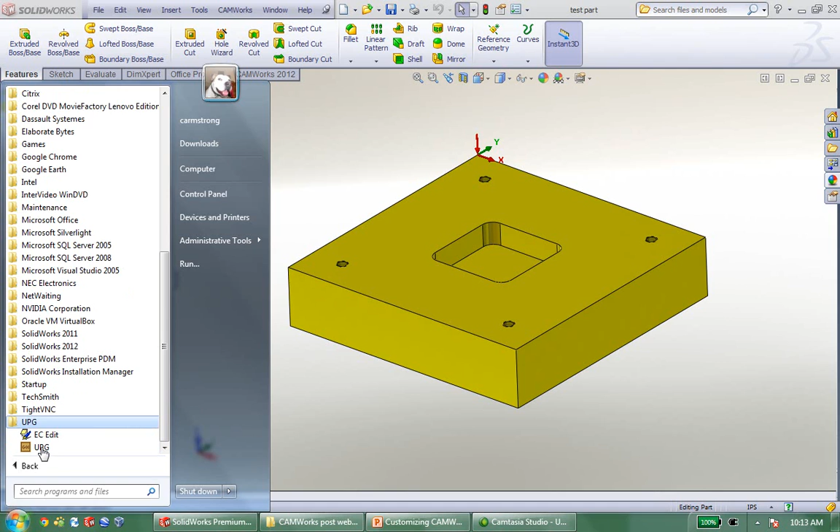I'm going to go ahead and launch the UPG. Okay, this is the interface. Again, it's very friendly. It's not a lot of computer programming, it's simple in that sense. It is a bit of a different workflow, though.

In the case of the UPG, for instance, I'm probably going to create a post from scratch. I'm going to create a post starting with a generic FANUC controller, and build on top of it with whatever features I may use. I use FANUC controller as an example, but it could be anyone. Whereas if I'm working with the EC editor, chances are I was sent that file, maybe from Digital Dimension support.

I called up and I said I need a post processor for a Fadal 4020, and the support rep sends me this post and the zip file. I open it up and I start editing it. Chances are I'm going to be doing that with the EC editor, and I'm going to go over an example of that later. But with the UPG, most of the time I create it from scratch. I start from an example post and just start building it. So that's what I'm going to do.

I'm going to start a new post processor. File, New. It's going to ask me what type of machine, mill or turn. In this case, I want a mill. I want it to be a FANUC based controller, and remember, this is just the base. Then I want it to be a Haas. We'll call it a Haas controller. Once I have that, I'll just hit OK.

And now I've opened up the Haas source file. Again, because this is such a friendly interface, it's really just a bunch of buttons that allow me to customize it. But this is the source file that's used to compile to make your post processor. So, without going into too much detail, you'll see here I've got details like the machine name. If I had 5 Haas machines, I probably want to give it something else besides just Haas - Haas VF3, Haas VF3 number 2.

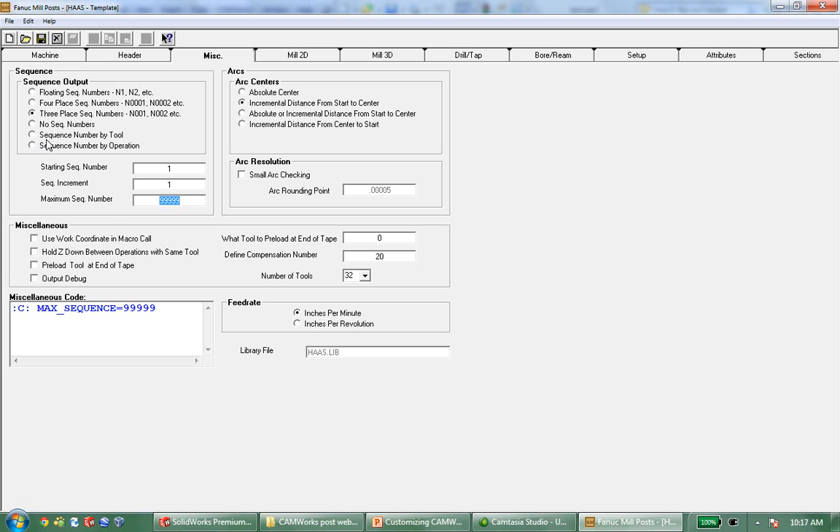Other than that, I'm going to move on. Getting into some of the mill-specific features, there's not a lot of detail I'm going to go over specifically. Absolute and incremental—a lot of the time you want to control these from CamWorks. Work coordinates, coolant—these are all things I can control from CamWorks, which is why I'm not going to spend too much time on them.

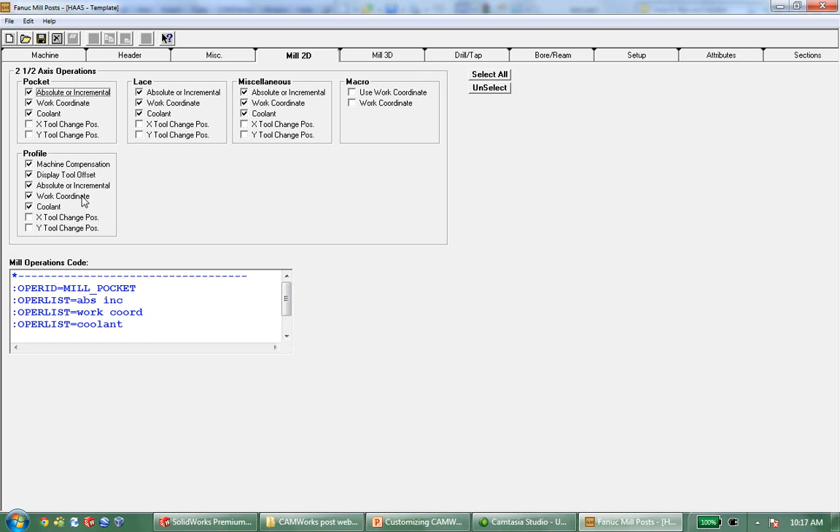Some obvious options, like display tool offset—those are things you're going to need to have on, but I can see specific scenarios where that may not be useful. Maybe not for milling machines, but laser cutters and things like that, where I may not need a tool offset. Getting into the interesting bit, I have my mill sections, all with really the same options.

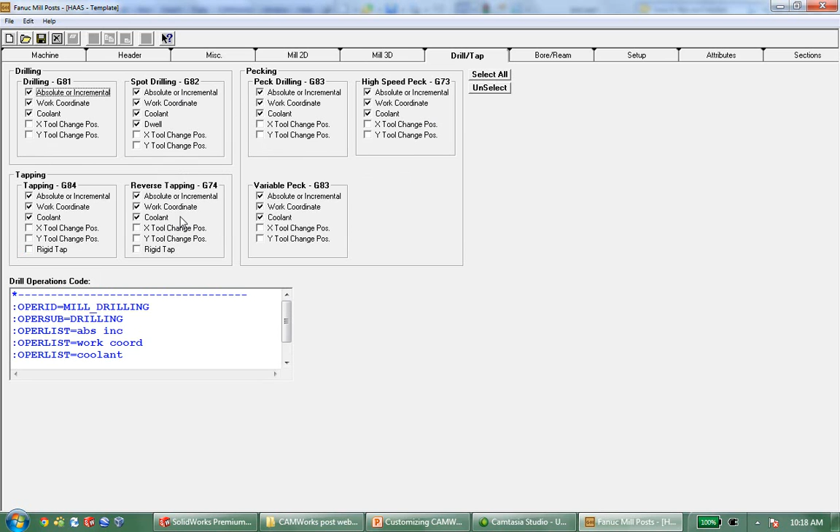Do you want coolant on in UV cuts? Do you want it to be absolute or incremental in UV cuts or Z-level cutting? There's a lot of specific settings for specific operations in CamWorks—I'm not going to worry about changing any of these. Same thing for drill and tap: do you want it to dwell, do you want coolant on—all specific to an operation. G83 peck cycles, G84 tapping cycles, and so on.

Where we get into the interesting stuff is some of the setup. Now, the setup allows me to make the user punch in a number in CamWorks that will end up in the post. By default, you'll see it's prompting for program number and material thickness, but those are the only two—see how they're checked here? But if I wanted it to prompt for program name, maybe because I have a naming series for all my programs and wanted someone to punch that in, I could check this here.

Operation number, date—there's a lot of information I could possibly add into this, but I'm not going to worry about that right now. The setup allows me to establish things in CamWorks that I want to punch info in for, that I also want to see in the post.

Getting into attributes, here's one of the big things I find most users want: the ability to right-click in CamWorks and insert either an optional stop or a program stop. I can do that by just checking Make Available in CamWorks. Now what it's going to do is create a feature that allows me to right-click on a toolpath and say Insert Post Operation, specifying an M00 or an M01—an optional or a program stop.

Now, the Sections tab is really where we get into the meat of the post processor. How things are defined, in what order, in what fashion. Do I like this before this, and so on. So a lot of the details and customization in the UPG is done right here in this Sections tab.

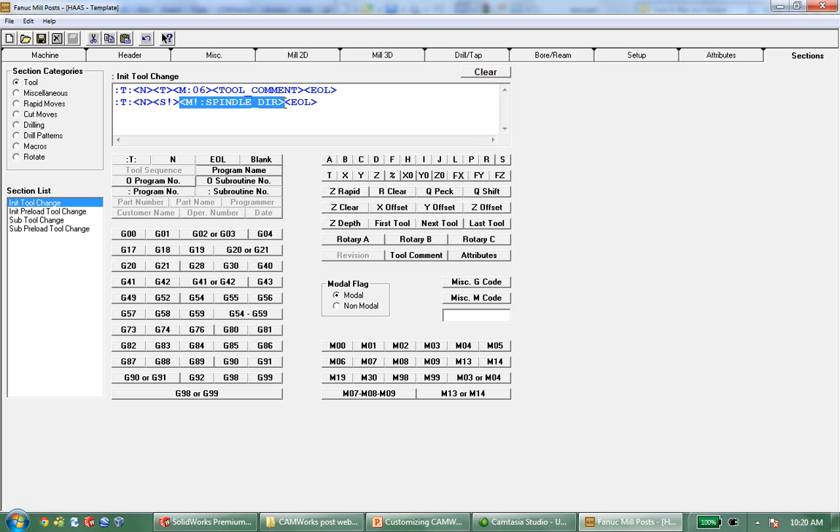Now it's a little confusing at first, but don't let all the nomenclature confuse you. Tool comment is just that - it's a comment that someone typed in CamWorks for this tool. And just like you might assume, M spindle direction is just that - it's the M03 or M04 that I might get calling up, turning on my spindle. S is the spindle speed, T is tool number, and M6, just like you might think, is the M6 command. So I can begin to decipher some of these things, even though it's computer programming to a certain degree. It's not very complicated programming, so it's easy for me to alter.

Going through this a bit more, if I go to my miscellaneous sections here, you'll see my start of tape. Start of tape is literally the start of the program, and that's why you'll see a percent symbol for your very first line. And then I get into my program number, O, and then the program number.

And then I get into the actual specifics of the startup line. By the way, this is just what they call a safety line - it cancels out all the previous commands that may have been up from an old program or from the last routine. Now, if I wanted to add to my safety line, maybe I wanted a different command in here, I could certainly just type that in.

But you'll notice the nomenclature is very specific. It always starts with a colon T colon. Then most of the lines start with an N, and the reason for that is that's a number line. So it's going to add an N1, N2, or in my case, N001, N002. But if you don't want it to post with a number line, you can get rid of this N.

For instance, I did that with both the program number and the very first line. I don't want N1 percent symbol - I just want it to say percent symbol, then my program number, then it can start with N numbers.

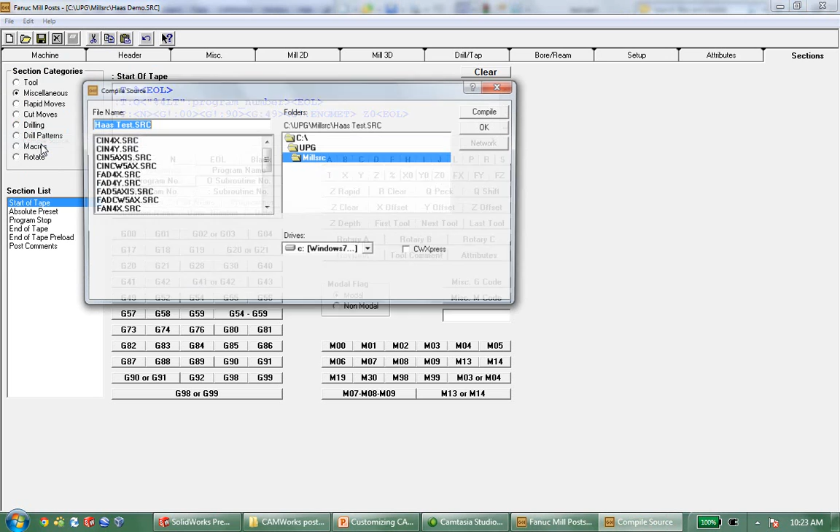Okay, and with that, you'll see it takes me to the default folder for the UPG, which is C UPG mil source, and in here you'll see all the different source files, including my Haas demo. So there's my Haas demo source.

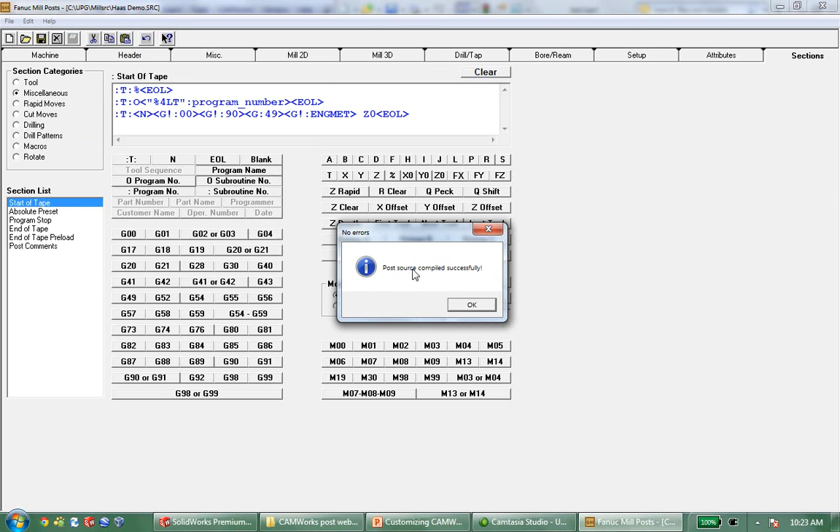I just hit compile, and I get a message: post source compiled successfully. Okay, now it compiled, but where did it go? Where's the finished product, right?

If I go to that folder, let's just browse to it here. C UPG mil source. There's no Haas demo CTL file, and if you have any experience with this, CTL files are what I'm actually posting to. The library and the source file, these two files here, are really just used to make that CTL file. So it's not posting to the mil source. I need to find out where it's posting, where it's compiling all this and putting it.

Okay, and to do that, I'm going to go into the preferences for the UPG. So file preferences, you'll see the pop-up here. I have a lot of details. The one I'm concerned with is CTL path.

This is the path that it's saving your finished post processors, and this is important because if I'm making all these changes and then I go into CamWorks and it's not changing and I don't know why, I'd make sure that the place I'm actually looking is this path. It's easy to make a simple mistake like that and not be posting to the right place, or not pointing to the right place in CamWorks, and not know that the things you're actually changing aren't being reflected.

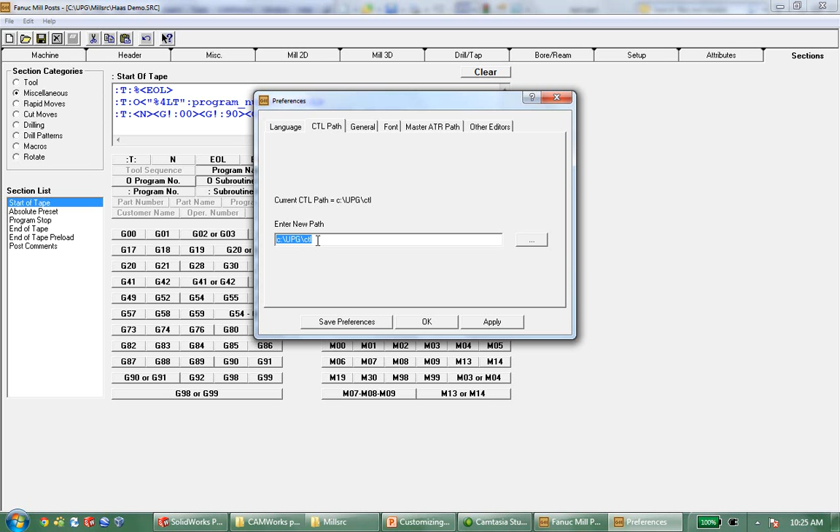Okay, so it's important to know where it's saving your finished post. In this case, it's the C UPG CTL. So if I go into that, we'll go C UPG, here's CTL, and there is my Haas demo CTL and lang file. We're going to get into this in the EC editor, but the post consists of multiple files: CTL, lang, lib, source, ATR, and potentially general files as well — Mil T32, general T32. It does depend on the post, and each file is necessary to compile.

You don't need all those files to use the post, but you do need all of them to compile it. And that's why when you get a post processor from Digital Dimensions, it consists of many different files. That's in case you want to open it up, change it, and compile it yourself. You have everything you need.

So I have this post, the CTL file here. I'm ready to post to it in CamWorks. Calling up CamWorks, you'll see here I have this part. I have already got everything generated. I have a pocket cycle and I have a drill and tap cycle, and I want to post using that one I just created.

So to do that, I need to specify use this post instead of my default, and I do that in the machine. So I double click the machine, I go to the post processor tab, and here I'm going to browse to my post. I hit browse. Right now that's the only thing in there, so I'm going to hit Haas demo, hit open, and select.

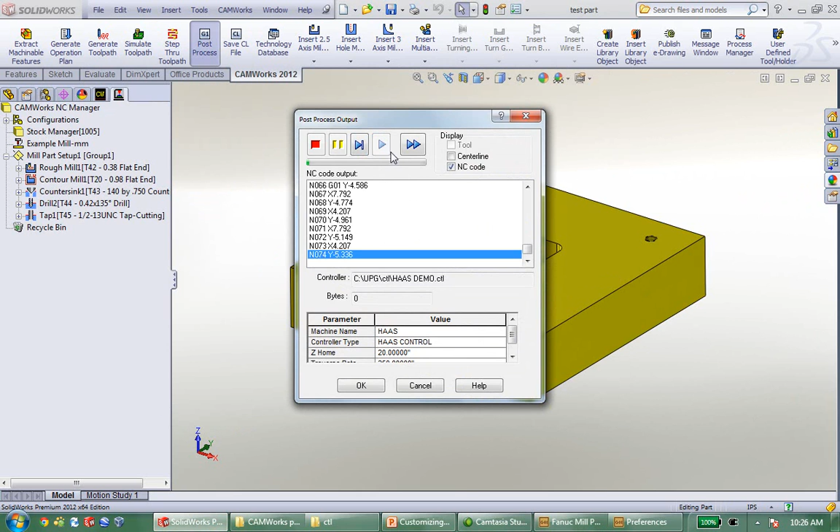I want to open this up separately so we can take a closer look. So I'm going to double click the test part. There is my code. Percent symbol, then program number. Notice N001 instead of N1, N2.

And then just going through some of this, you'll see kind of the format of the code. Here's my tool comment I mentioned just a moment ago. Spindle speed, spindle direction, work offset. And so now I can begin to decide, what don't I like about this?

I'm scrolling through this quickly here. We'll go down to the bottom, some of the drill cycles for instance. Maybe I don't like the fact that M9 is coming at the same line of code as the G80Z1. Maybe I want that to come before this, just between this last XY value and the retract and cancel for the canned cycle. Maybe I want that to come before it.

Well, that's one of the modifications I can make, and so this is kind of the process: you'll have the UPG up, you'll post out in CamWorks, take a look at the code, decide what you don't like, go back to the UPG and make those changes. So I just said, for instance, I want to display this M9 up above the G80Z1. Okay, so I'm going to go into my post. I'm going to find that line.

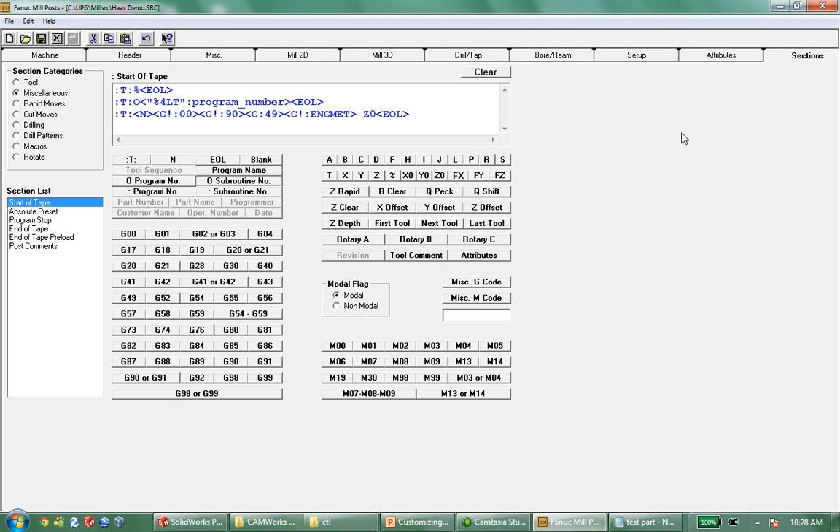Okay, now I know this is the canned cycle - this is the end of the drill cycle. So if I go back to my UPG and under sections, you'll see drilling as a section. And if I click on drilling, you'll see all the different drilling sections, including end drill cycle. End drill cycle has colon T colon, or colon T colon, N number, G80, G90, Z, operation rapid plane, which is a variable in CamWorks, and then my M9.

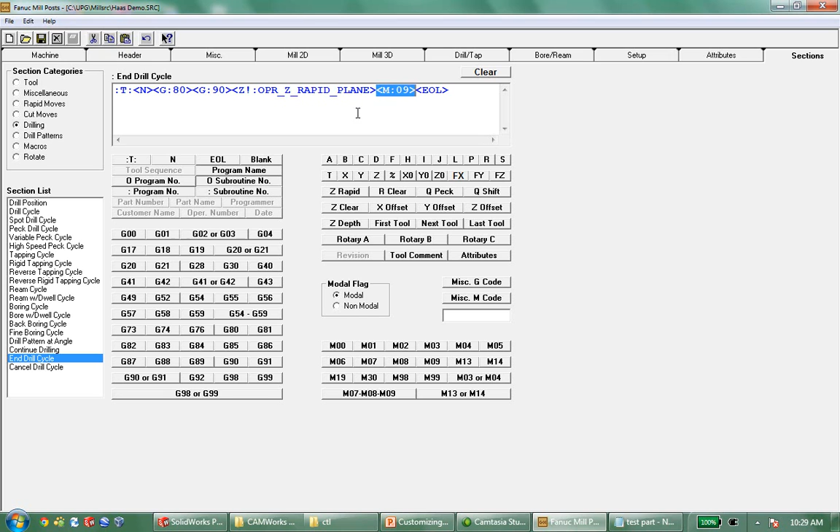And this is really what I want to get rid of. I want to move it up. So to do this, I'm literally just going to start typing in a new line above that one. So colon T colon, and then I can actually just cut and paste this M9. Make sure you get the open and close brackets - it's important. Okay, so M9.

Now I've made that change, I'm going to go ahead and save it. I have to recompile before I can test it. Okay, so I've saved it - make sure you save it, it's an important step. Then I'm going to go back to compile the source. Again, I'm going to compile Haas Demo.

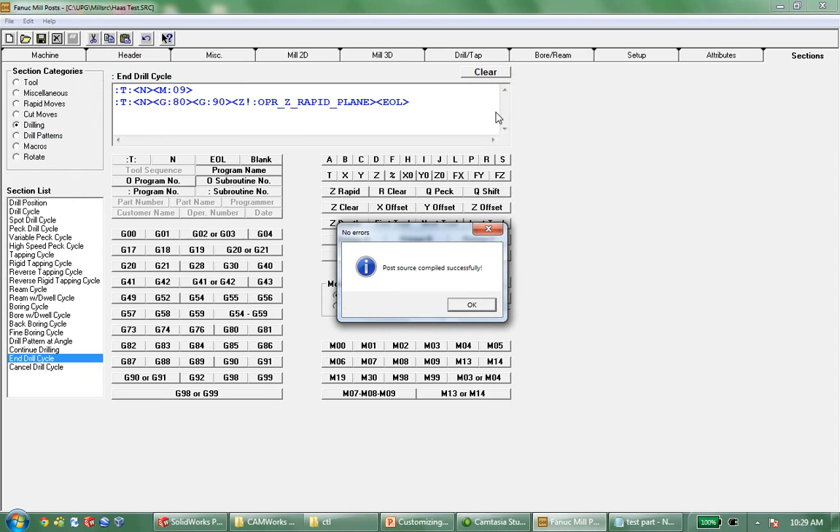And now, once I get this message, I can actually go back and test it in CamWorks. So now I'm going to go back to CamWorks. Now here's an important step - it's one of those odd things that works about CamWorks, you have to define the post processor again. I've run into this before. You have to go into the machine, and even though it's already pointed to it, I have to browse, hit Haas Demo, hit open, and select. It's just one of those things that has to refresh the CTL file, has to look at it again, so I have to go back into the machine and look at it and browse to it once more.

Alright, so once I've made that change, now I can post again. We'll just say, and we'll take a look at the code. So if I open up my part here, you'll see if I go down to the drill cycles, my M9 is now coming before the G80 Z1 point.

And it's important to point out, I'm doing this across all drill cycles - remember, it's drill, tap, in this case even countersink. It's going to call up now the M9 before the cancel for the canned cycle. So that's kind of the workflow, the process I might take to make simple changes using the UPG to make modifications to my post so that it's formatted the way I might like it.

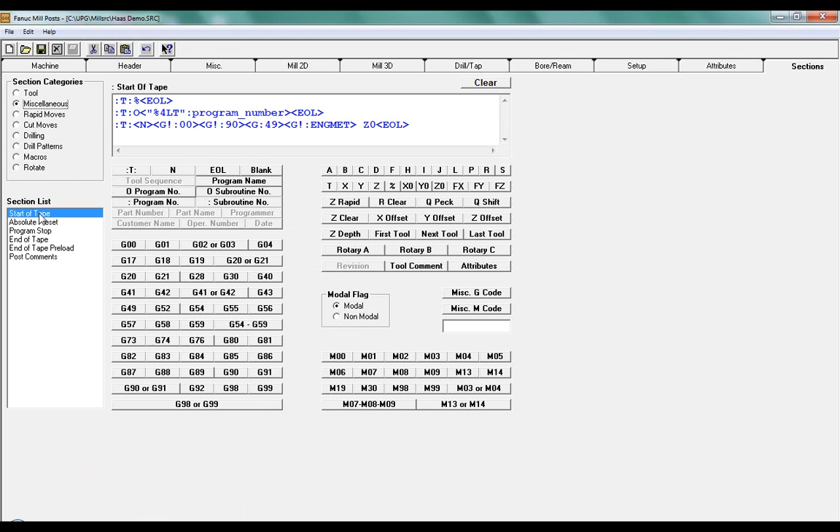Okay, so now that I have added that, let's go ahead and move on. I'll show one more example where I might use the UPG to make a simple modification. If I go up to the top here, you'll see my safety line, G0, G90, G49, G20, Z0. I'd like to add a G80 canned cycle cancel to this as well. So again, I'm going to go into my UPG, and under the miscellaneous, you'll see start of tape. In the start of tape is that particular safety line, you'll see the same G0, G90, G49, G English metric, G20 or G21, and then my Z0.

I want to add a G80 to that. So I'm just going to click in there where I'd like to place it, right between these two - you'll see the cursor. Then I'm literally just going to click the G80 button, and you'll see G80 get added to that line of code. Now, there's one important thing I want to do before I finish, and that is force it to show up, and that's using an exclamation point. When I use an exclamation point like that, it's telling it whether it's modal or not.

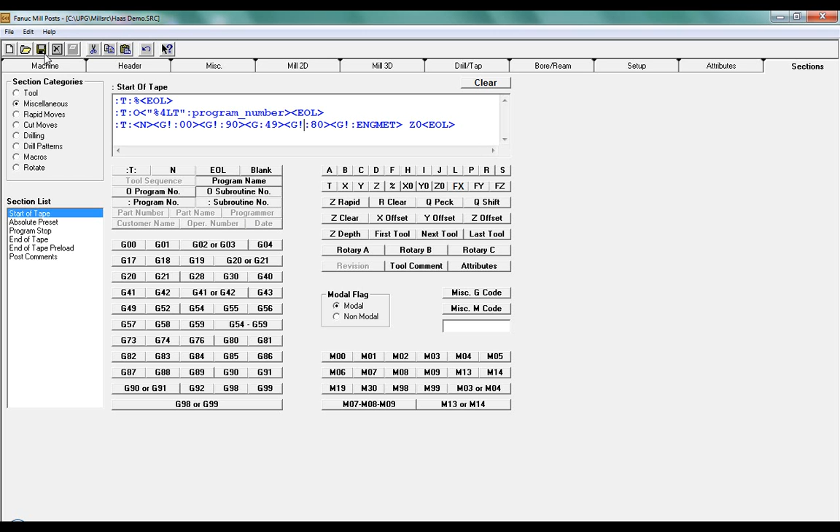Post processors support modal commands just like in the controller. Whether it's modal or not, I want you to show this G80 - in other words, whether it's necessary or not, I want to show this G80. And that's why I put the exclamation point there. So now that I've done that, I'm going to go ahead and save it and again compile.

Okay, now I'm going to test this in CamWorks. So I'm going to go back to CamWorks, we'll browse to my updated CTL file. Remember, it's just overwriting the same one every time I make a change and compile it again. And now we'll post.

And now, if I take a look at the code, you'll see a G80 is now in my safety line. Okay, so again, that's just the general process of making a modification and viewing it in CamWorks - making a modification to my post, compiling it, and seeing how it looks in the posted code.

So now that we've done that, I'd like to move on to another topic, and in particular, the EC Editor. I'd like to show you an example of using the EC Editor to get a little more advanced into custom programming your own post. I might use the EC Editor where the UPG doesn't give me exactly what I'm looking for - I'm trying to do something a little more advanced, something that I couldn't do in the UPG.

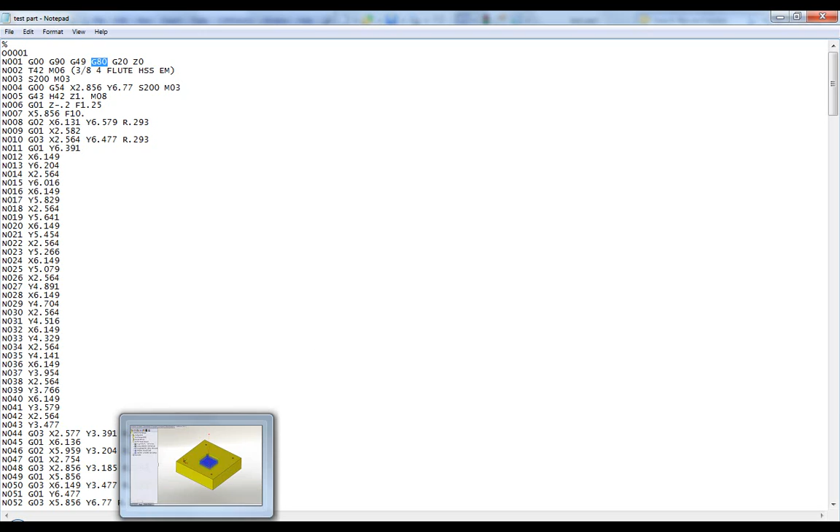So, to give an example, I have my same part up here. A lot of controllers have an option for what they call high-speed contouring, high-speed machining, high-speed contouring - a lot of different names for it. And the Fanuc-style controllers, it's most often a G5P or G5Q, some kind of command like that. In my example here, I'd like to go over a standard Fanuc 6M. I'd like to add a G5P10000 to turn on this high-speed contouring option.

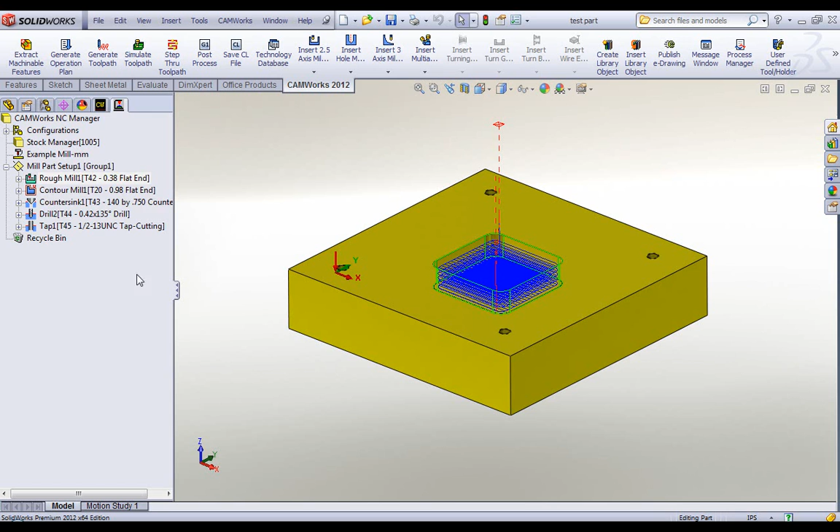The problem I have is it doesn't necessarily apply to all toolpaths. I don't want high-speed contouring on every single one, especially things like countersinks or drill cycles. So it needs to be on demand. I need to be able to select it, turn it on when I need it, and then not use it, have it off when I don't.

What I'd like to do is create an attribute in the post that I can tap into in the CamWorks interface and tell it to turn on and off. And I'm going to turn on and off this high-speed contouring option.

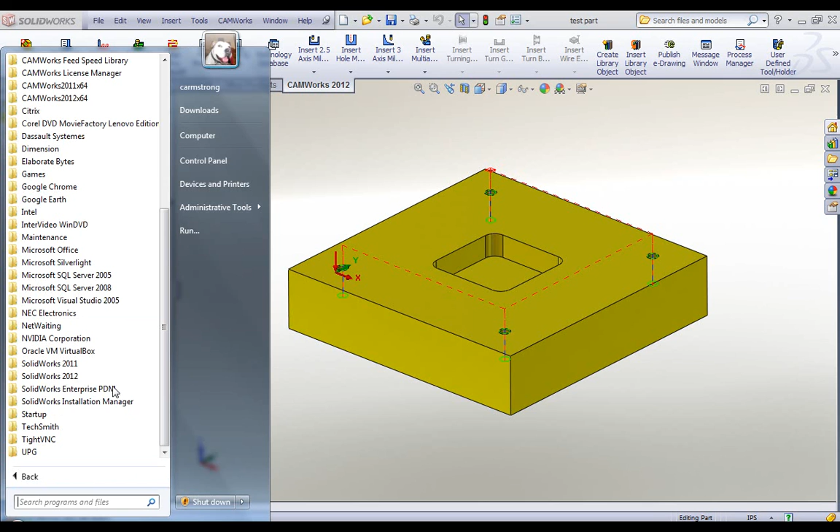Now, working with the EC Editor is a bit different. I'm going to go ahead and call up the EC Editor. It's under my All Programs - see it right here, EC Editor. And I'm going to go ahead and open up my post.

Now, what you're going to get - let's go ahead and delete these files - is a file like this. So you've contacted DDI support, they said okay, I need a Fanuc 6M controller from Mori Seiki for CamWorks. The support rep sends you something like this, MSRC 110. It's a zip file. What you're going to do is extract this zip file.

I'm just going to put it in the post folder here. And you'll notice a post consists of a lot more than just one file. I have my CTL file, that's what CamWorks uses to post. But then I have all the files necessary to compile to make that CTL file - my source file here, my library file here, my general T32 - and these are all the things that I'm going to need to compile to create my own custom post.

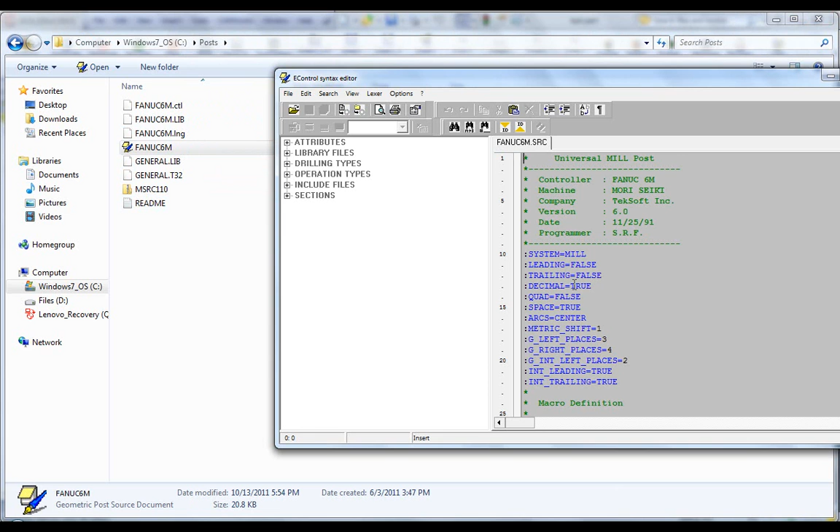Now the first step is I've got to open up the source file. So I'm going to go ahead and drag open, get that right, my source file. The first step is I've got to make sure it compiles successfully first. I want to be able to compile it, test it, and use it in this way that it is right now, just to see where it's at.

Before it can compile though, it needs to know where all its files are. So if I go into, you notice on the left hand side here it says library files - you'll notice that the library files it's looking for, this fanuc6m.lib, it's pointed to the F:\MILL\LIBRARY folder. Okay, that doesn't exist on my computer. I need to tell it where that file really is. So I'm going to go into my C:\Posts folder where it actually resides.

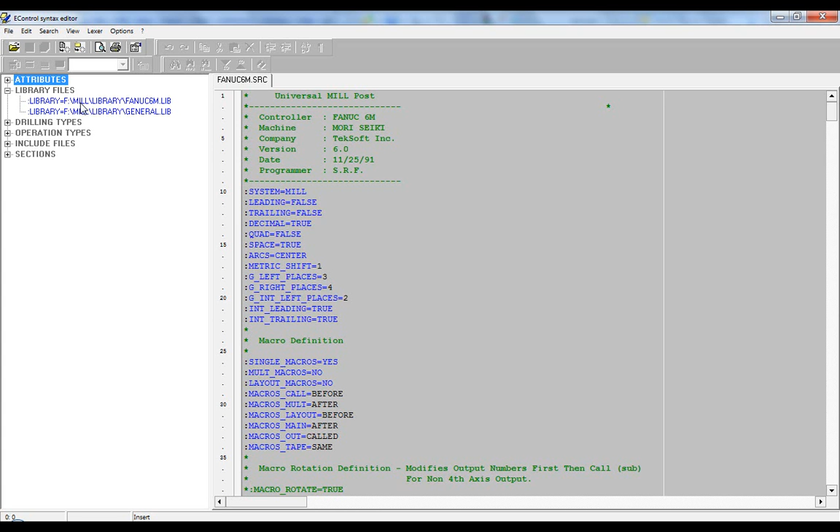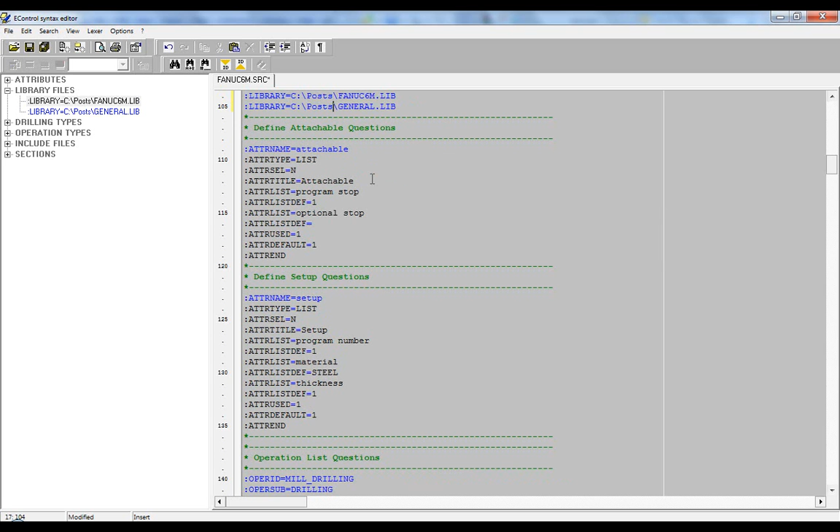I'm just going to copy that path, and paste that into this section of the source file. So I double click over here, it takes me to that section in the source file, and I can paste a new path in. Now I also have to do that for the include files. So you'll see include files here - I'm going to paste that path as well.

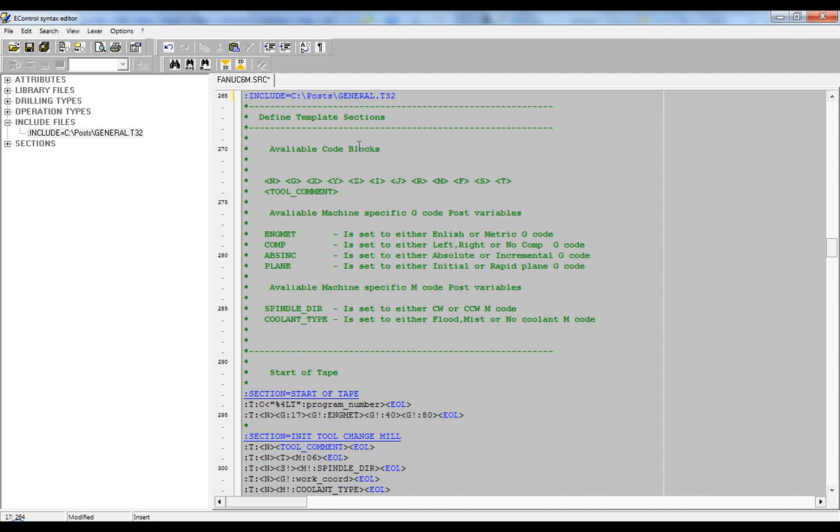But before it can compile, you must go through and make sure that the references that the post is looking for are there and are accurate. Those paths have to be right or else it will not compile successfully. So once I have that, I can go ahead and hit save.

Okay, then I can try compiling. Remember, you're still going to use the UPG to compile. So I have to go back to the UPG and go File, Compile Source.

I'm going to compile this FANUC 6M. I select FANUC 6M, I select Compile. If I did it right, I get Post Source compiled successfully. So now I can post to that.

I can test it out. So I'm going to go into my machine and browse, and there is my FANUC 6M, in the UPG CTL folder. Remember, we pointed to that in the UPG options. So I'm going to point to that FANUC 6M. I'm going to hit open and select, and we can post out our code.

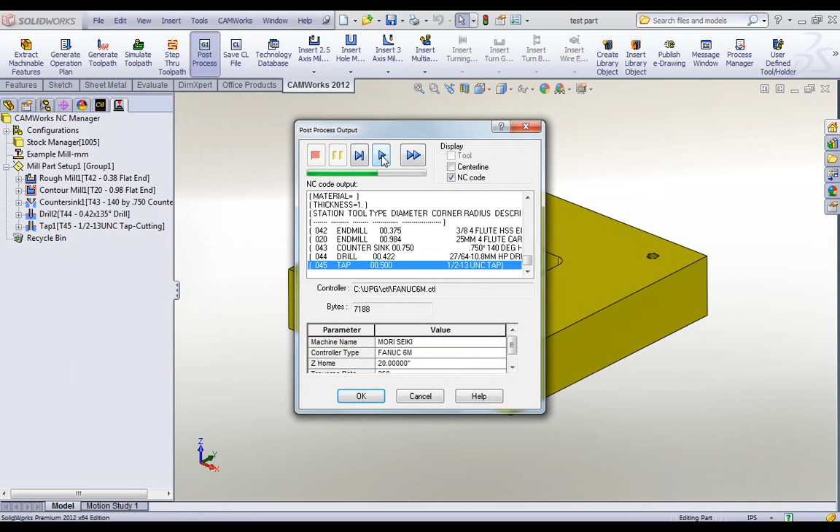So taking a look at this, let's go ahead and open this up. What I'd like to do is add that high-speed machining option just after the tool change. Before the spindle command, but after the tool change, I want to add the G5 P10000. And again, I want it to be an option so that when I turn it on, it's on, but it's off by default, and I want it to go right in here.

So to do that, I'm going to go ahead and start by going back into the EC editor, and I'm going to open up the library file. And the library file, in my case, the general library file right here, is where I define a lot of the attributes and calculation sections.

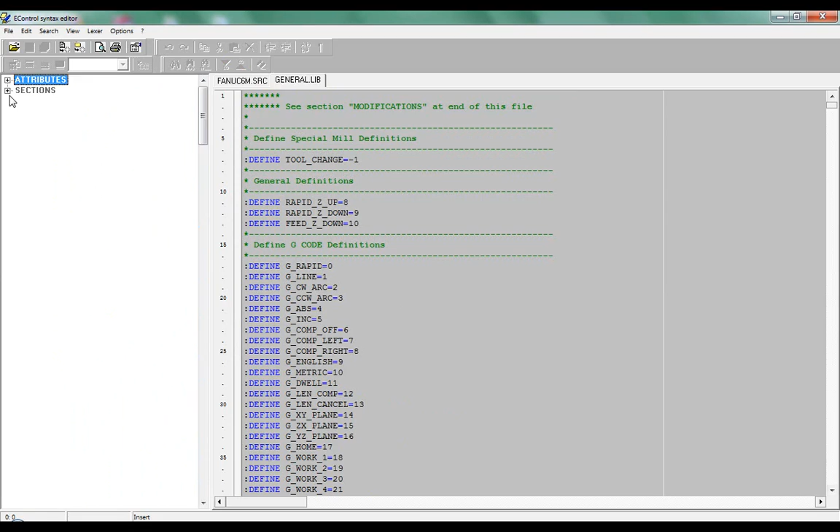So if you see attributes here, there's a long list of attributes, all different variables I can tap into, and then there's a long list of calc sections, all the necessary calculations for post processors.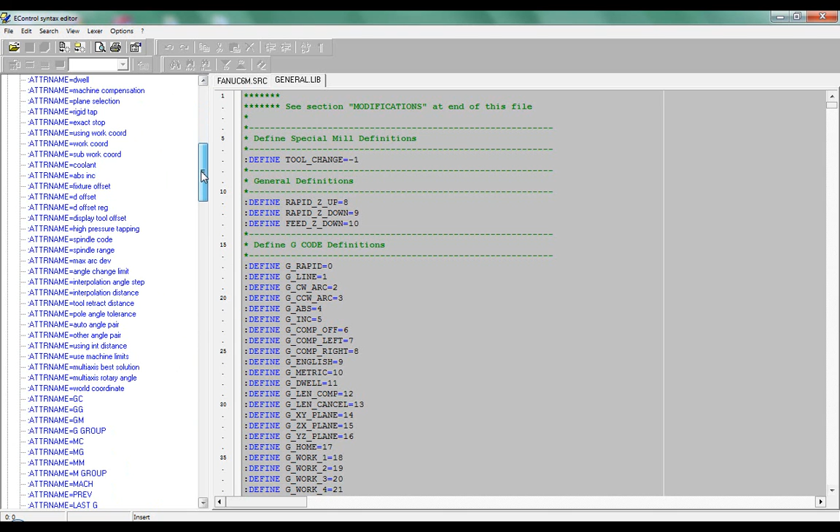Now what I want to do is I want to add a custom attribute. I'm going to call that custom attribute. I'm just going to find a random spot here to place it. We'll put it right about here. So what I'd like to do is add a custom attribute.

First off, notice I'm commenting out a section. I just want to do that for my organization's sake. Now, by the way, an asterisk starts a comment out section. So notice I start with an asterisk, then a bunch of dashes, just kind of organizing things. And I'm going to create my own attribute. So I'm going to start with a name, attr name equals high speed.

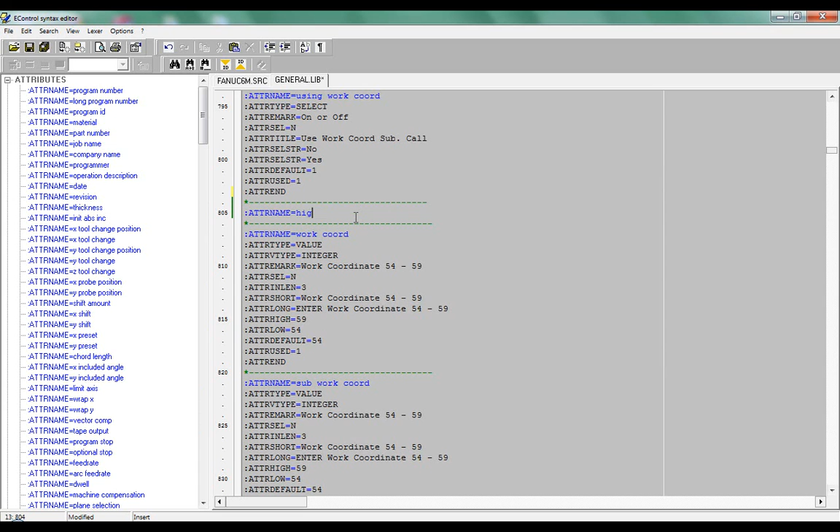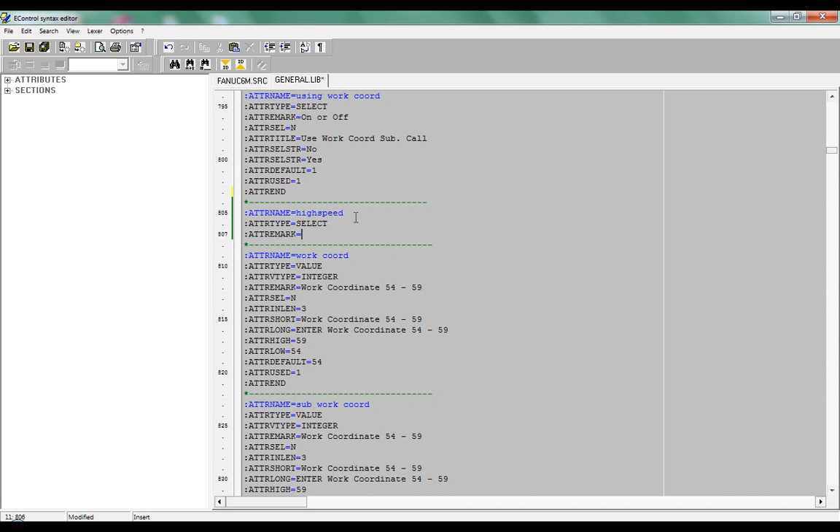Attribute type equals select, which means it's going to be a select box. Attribute remark, just a note, so I'm going to say high speed machining.

Okay, then attribute select. And what this option is, do you want it to show up in the mill part setup options, or do you want it to show up in the individual toolpath options? In my case, I'm going to select no, I want it to not show up in the setup, I want it to show up in the individual toolpath.

Then I'm going to go to the attribute title, and that's going to be speed. Then I get into my select strings, and these are literally the things I'm going to be clicking on.

So I want the first one to say off. I want this off by default. And then I want my second attribute string to say high speed. So those are my two options. I either have off or high speed. Kind of go or no go.

And then I'm going to go to attr default, and I want it to be 1, meaning the first selection is the default, in my case off. I want it off by default.

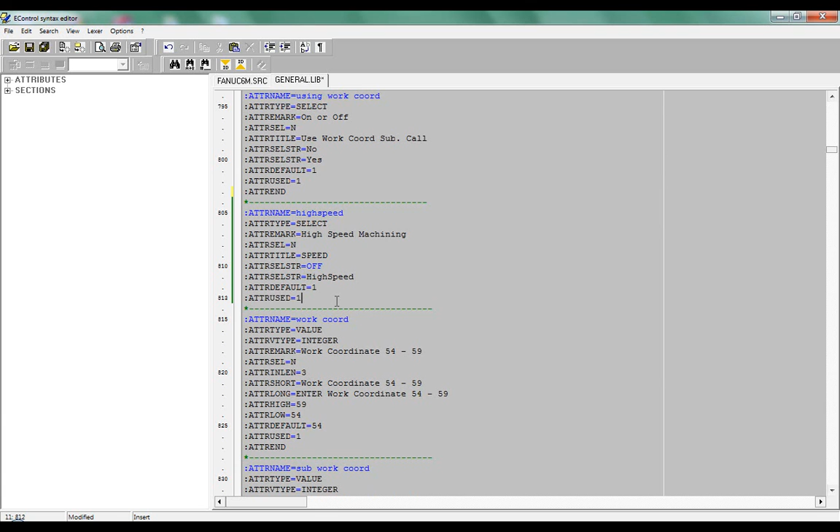Lastly, attr used. This is just whether or not it compiles it. If I set attr used equals 0, it's going to ignore it while it's compiling. And then lastly, attr end, it just ends the attribute.

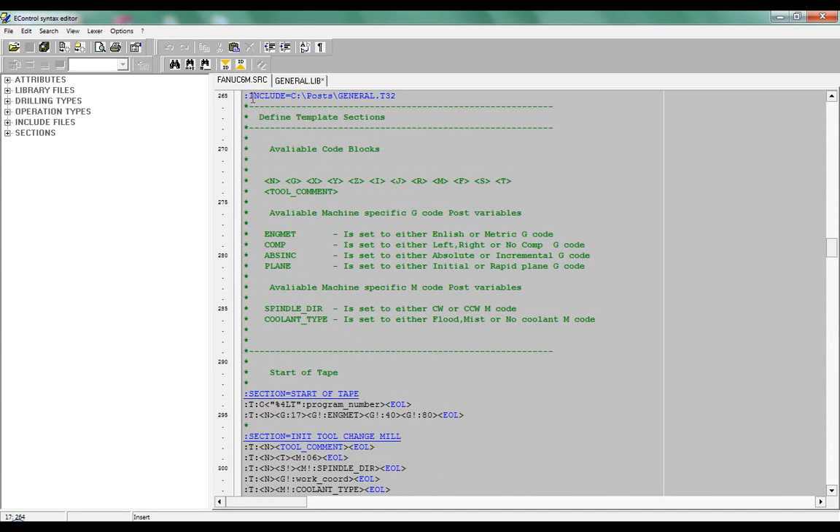So now I've created this custom attribute. Now what I need to do is put that attribute into my source file in the pertinent places. The first thing I have to do is go back to my source file here, go back to the FANUC 6M source file. I'm going to expand out my operation types, and you'll see the different operation types.

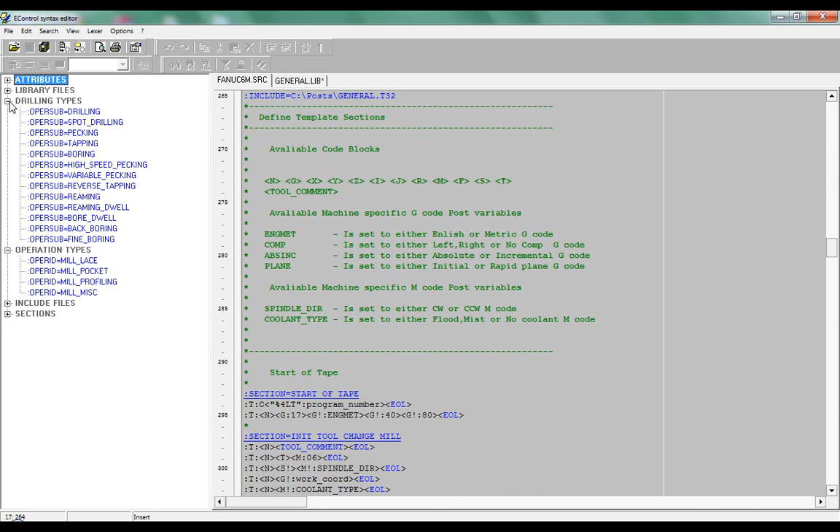Now, I don't want to apply this to drilling cycles. I don't see a need to add high-speed machining options to drilling cycles, but milling cycles can definitely benefit from this. So for each one of these milling cycles, these oper IDs, I'm going to add a new list item.

Oper list equals high speed, my variable. I'm going to add that to each one of the oper IDs. So I'm just going to copy and paste that into all 4 of these, that way it shows up no matter what type of milling operation I'm doing, whether it be a lace or a pocket or any of those things.

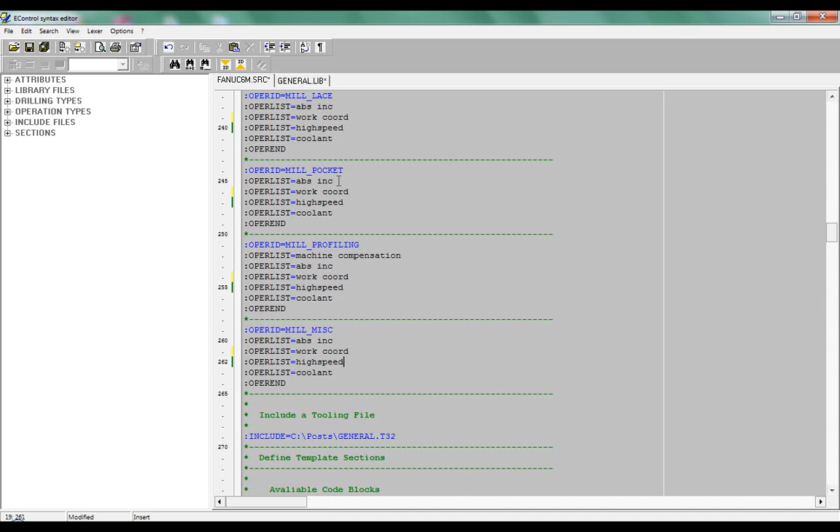Now that I've added that attribute to the oper IDs, I can actually program it into my code, or where it's going to show up in my code. So I'm going to go into the sections, and you'll see initial tool change mill. I'm going to write, just below the tool comment, T colon, brackets N.

If high speed type speed equals 2, then G5 P10000. Then I have to end the if-then statement with an end if, and then lastly, end of line. Have to have the end of line in.

So that's my logic. I'm saying if the high speed option is set to 2, which is high speed on, then post a G5 P10000. If the high speed is set to 1, it's just going to ignore this.

So now what I'm going to do is go ahead and copy this, and I'll paste it into the subtool change as well. I don't want it just in the initial tool change, but also the subtool change. So you'll see now it's below the tool change line in both sections.

So now that I've got that, I'm going to go ahead and save it, and now we can compile. If I did this right, I'll go File, Compile, Source, it should just compile successfully. There we go, post source compiled successfully.

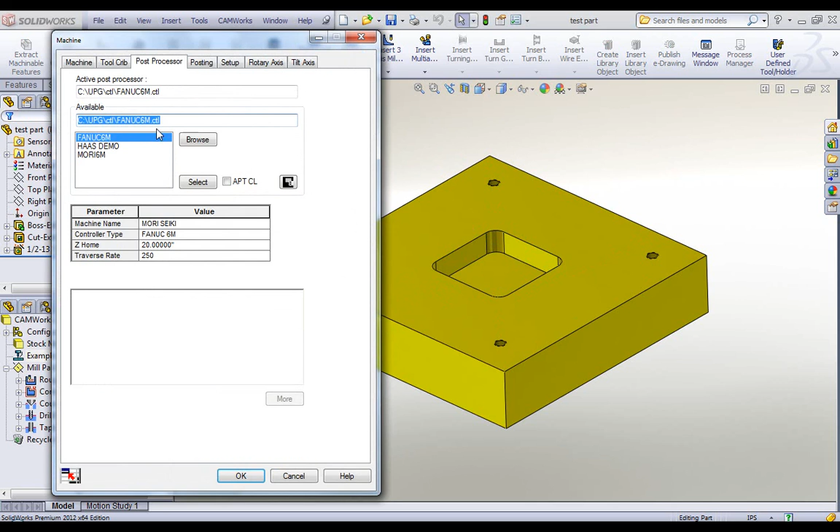Now that I've compiled it, I can test it. So I'm going to go back into CamWorks, and just like I did before, I'm going to go into my machine and refresh the post. I'm going to browse, go into my new post file, and select it.

What I want to do is add this new high-speed contouring option that I've created to this particular contour mill. My whole goal in this is I want this to be an option in the interface, a pull-down button that I can select and say okay, turn on these particular commands.

And to do that, I had to add it to the posting tab. So if I double-click the contour mill, you'll notice that anything I added shows up on this posting tab, including the speed attribute that I created.

Now you'll see under speed, the default is set to off, but if I hit the drop down, there's an option there for high speed. That's essentially what I created. I created the speed attribute, and then I gave it 2 options, off and high speed.

Notice it's off by default, which is what I want. I don't want this to be an on option all the time. I just want to be able to turn it on when needed. So I'm going to go ahead and set this to high speed, hit OK, and now I can post this.

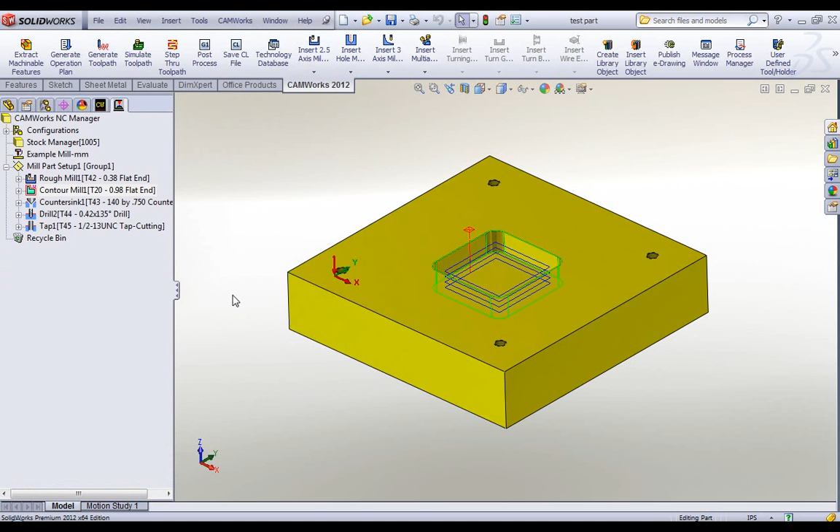Now if you remember, there was nothing between the tool change command, T whatever M6, and my spindle command. If I did this right, it should show up right between those two. So I'm going to go ahead and yes, and we'll take a look at that.

And so now you'll notice between the tool change command and the spindle command is my G5 P10000. And so that's really what I've accomplished here.

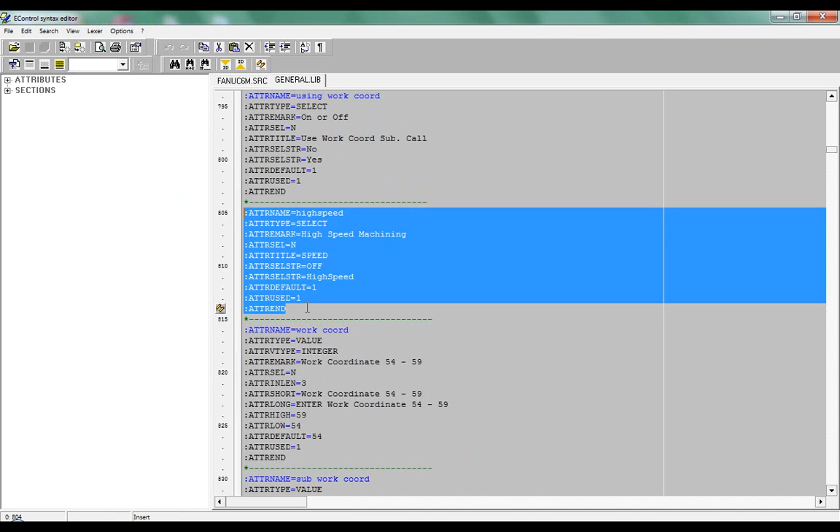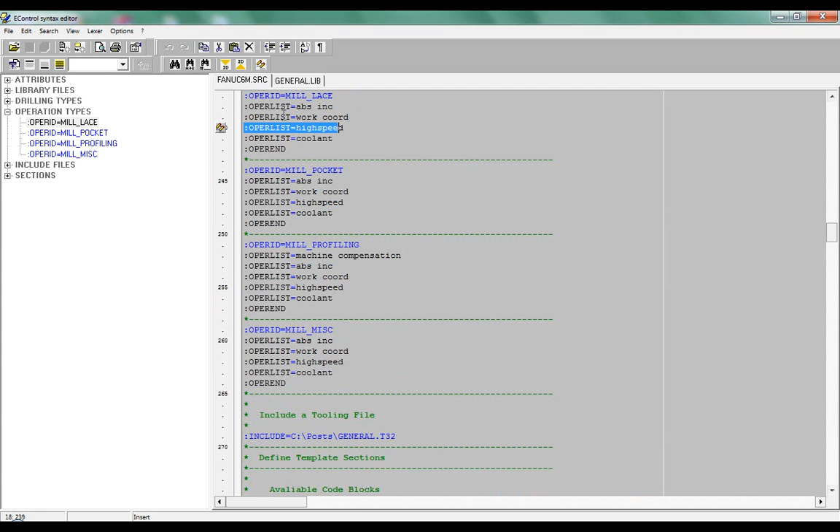To recap, let's go back here. I added an attribute of high-speed machining to the general lib file. Then I went back to the source file and added that oper list to each oper ID. So I added high speed to each operation ID.

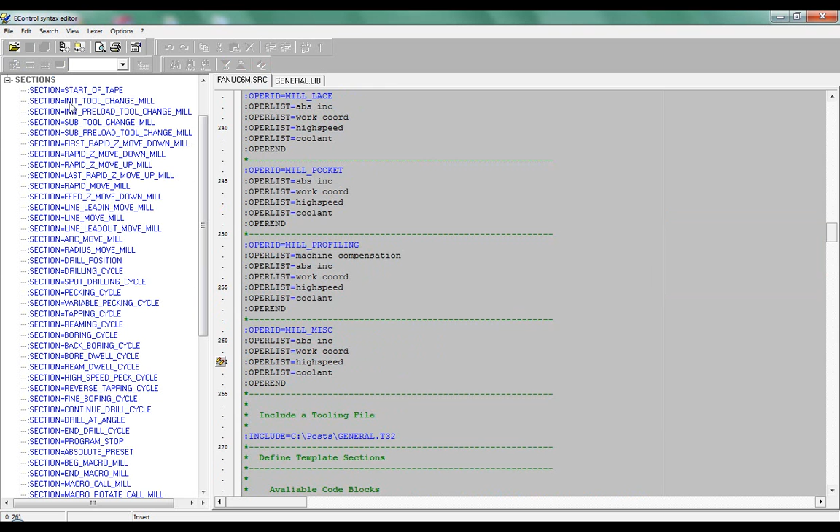Then I went into the individual section that I wanted to see this command and created an if-then statement calling it up. So in my initial tool change, I said if the high speed is set to 2, then call up the G5P10000 command. And again I added it to the subtool change as well.

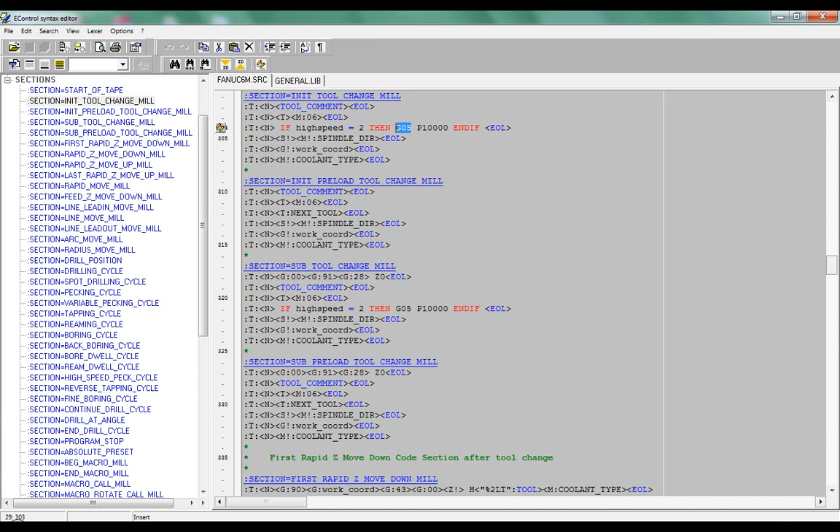And so now it's an available option when I'm setting up toolpath in CamWorks. So that's pretty much what I had planned.